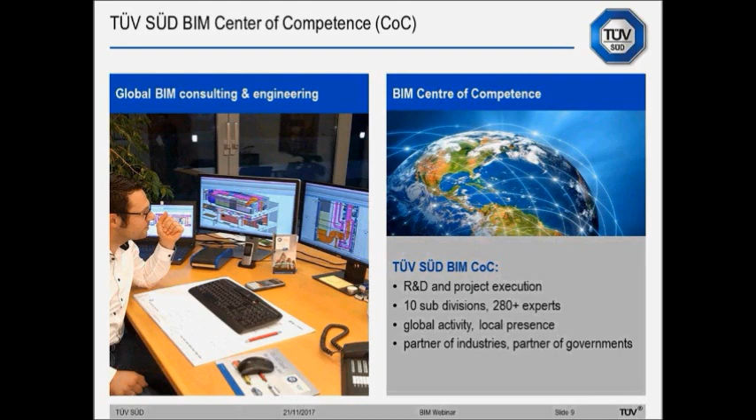When I say 'we', I mean the so-called BIM Center of Competence - our global organization that heads all TÜV SÜD BIM services, such as consulting and engineering. In our BIM COC, we join both R&D as well as project execution, mainly in areas such as industry and government. The BIM COC is the roof for a total of approximately 280 plus experts working in BIM. What I feel is really important to say is that our BIM topics are so diverse that intercultural, interdisciplinary work is absolutely essential to cope with the quality and performance of every BIM project. Since we have so many different roles in BIM projects - engineering, BIM implementation, safety simulations, energy and sustainability audits, BIM model, rail design - the global COC is really the roof for all these BIM topics we do in our daily business.

Building information modeling - you see I highlight the 'I' in BIM. So why did TÜV SÜD need to develop this new technology? I can tell you we're not digital maniacs getting paid to be super nerds. We came to BIM because our daily business was facing problems that we could not solve with classical technologies and methods from the past.

One issue I'd like to show you is sustainable environments. Here it's all about a lack of resources and energy that demands us to be much faster and cheaper in designing and auditing green concepts for single buildings, but also for whole cities. We faced the problem that simulations and energy concepts are too expensive and take too much time to program and develop. So we were seeking a much cheaper and faster way to help our clients build and operate more sustainable buildings and implement sustainability concepts much faster and cheaper.

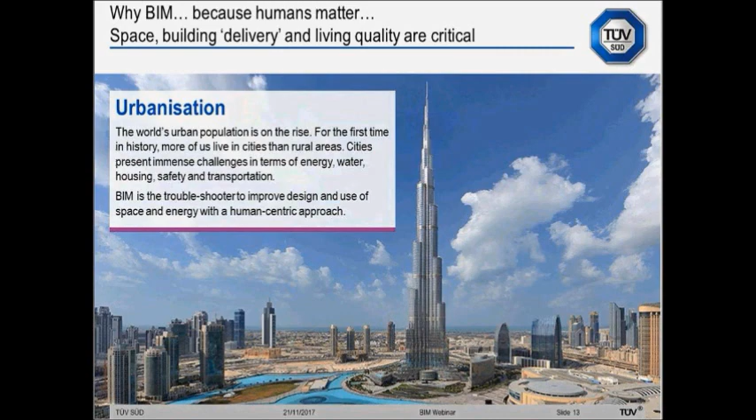The third pillar where we needed rapid change was transportation and logistics. Here we understood that urban transport projects are very cost intensive and long lasting, since underground or road extension projects require extensive pre-project analysis and huge data understanding to design fast, reliable and cheap public transport. So all these issues we faced as a consultant and engineering organization made us implement BIM, to turn the problems from the past into chances of the future.

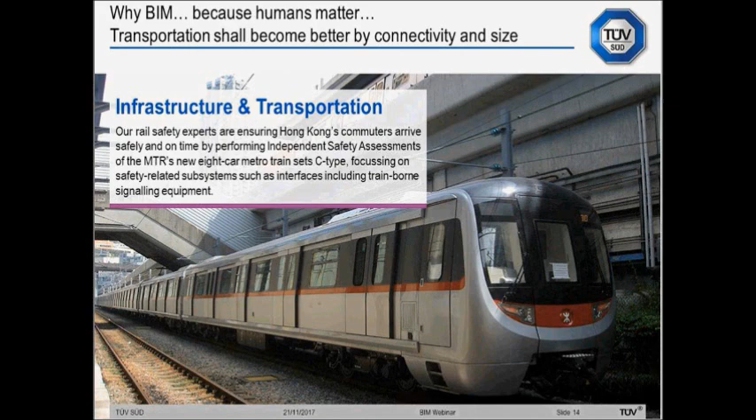Since our daily business really faces the life cycle of all assets, both in infrastructure and real estate, our BIM services are also 360-degree. Starting with BIM consulting, BIM strategy, followed by BIM implementation, BIM management, BIM engineering, BIM design, and BIM training. So we really have a lot of diverse BIM tasks in our daily business, which is why we rose up this 360 international team.

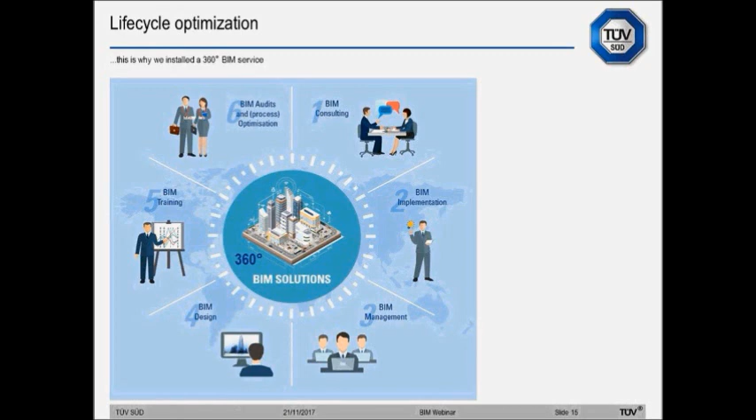About our definitions: I highlighted the I in BIM, but there's another interesting term we use, so-called digital prototyping for AEC, which means architecture, engineering, and construction. True BIM is really beyond 3D, meaning the so-called level of information plays a really important role.

Looking back and comparing technologies used in past years, BIM is a really dramatic change. In 2D, we created just schemes of an object, really abstract. In 3D, we created views of an object. With BIM, we create a fully functional prototype of the later asset. This means we have a virtual construction, and not only that, but added simulations and optimizations. This process of digital prototyping—virtual construction, simulation, optimization—is a very powerful improvement, especially for our building owners and investors.

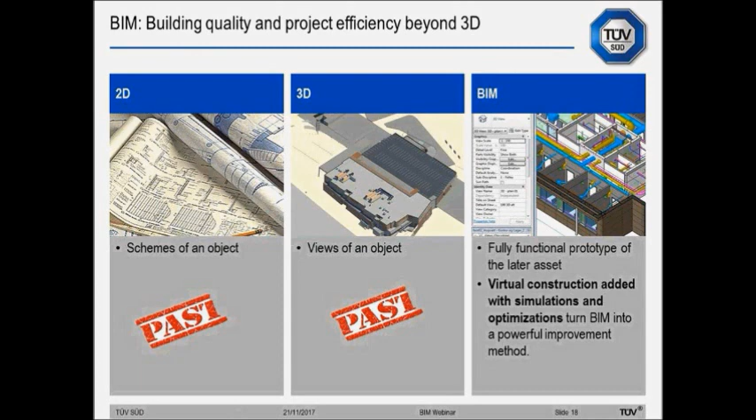Coming back to the point we highlighted earlier, the I in BIM: it's very important to say BIM is really beyond 3D, meaning the so-called level of information is very important. An empty BIM model does not bring you any benefits—this is only 3D by visibility. This is emphasized by the LOD, level of detail, which is all about how detailed you see the model. But the key is to bring real intelligence right into the building models, and this goes by the so-called LOI, level of information.

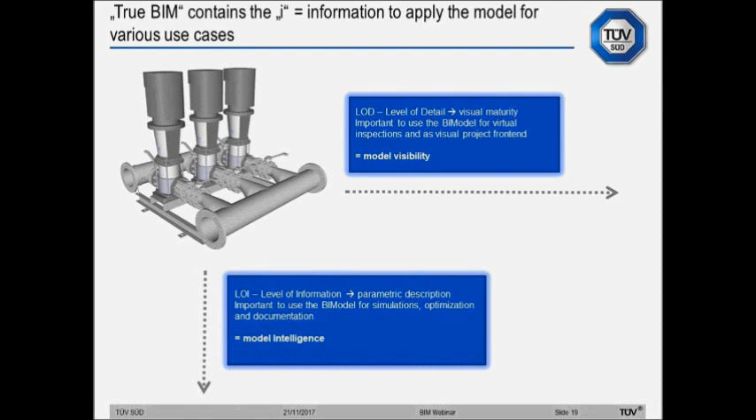Here it's all about the proper parametrics to run or execute the simulations, optimizations, and documentations. By adding information to the BIM model that you really use for this analysis and simulations, this is the real key. To give you a short overview of what the I in BIM—this parametric information—can be, here is a short overview.

Space optimizations, you already know, are about the 3D amount and spatial programs. In this area we also have clash detections, or what we call collision-free construction, which saves approximately 2% of the whole project budget. Also, we have maximum surface and spatial efficiency due to the fact that we can streamline and optimize spaces. Later, I will show you some project references.

4D and 5D is about the construction period—not about the building, but about the construction processes, where you can track time and budget in real time. So even if you make changes by yourself about the facade or about rooms, you can really understand the cost ratio of your changes, which empowers the design speed and the decision speed of the project.

6D is all about fast commissioning and digital working, as we call it, in the operational phase. This is about accurate project documentation without remapping or rearranging project data, and lifting it over to facility management.

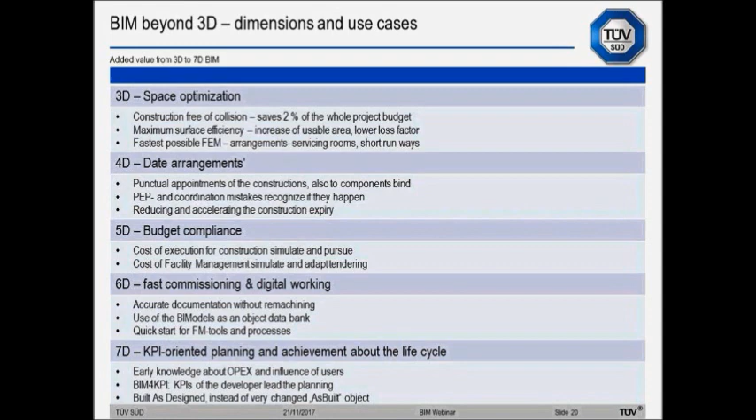So if you're using BIM as the owner or investor of a building, first you make your contractor really not see BIM as a kind of new method of documentation, but really also use and apply the BIM model as the real prototype of the later building, which means this can be the center for any simulations. This can be your project information model, for example, for creating very precise bill of quantities to prepare the construction period for time and cost monitoring and so on.

Also very important, looking to augmented and virtual reality, this is very interesting to use the BIM model as the visual model for developers and stakeholders, because imagine you can go into the building even in design stage, so much earlier than the real building is built in reality.

And last but not least, very interesting to use the BIM model as the building dashboard for financial due diligence and for technical due diligence, yes, and also for asset operation and real-time monitoring.

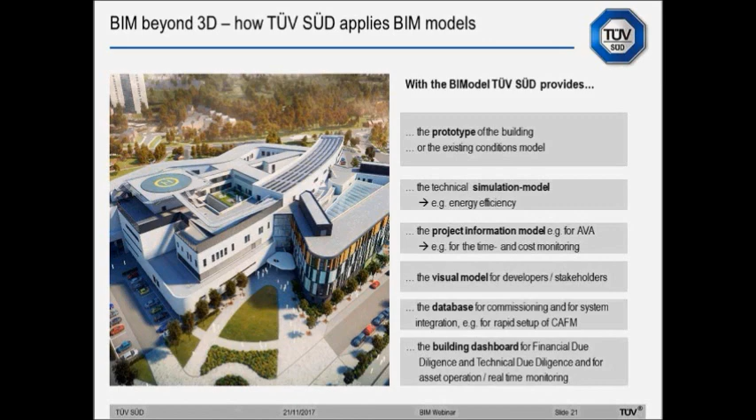So as a summary, I can say this is the effect that we get out of BIM if we apply it as the digital prototyping. This is faster design, much earlier simulations, cheaper optimizations, and for sure this leads to more sustainable operations. Remember, if we can add energy concepts here.

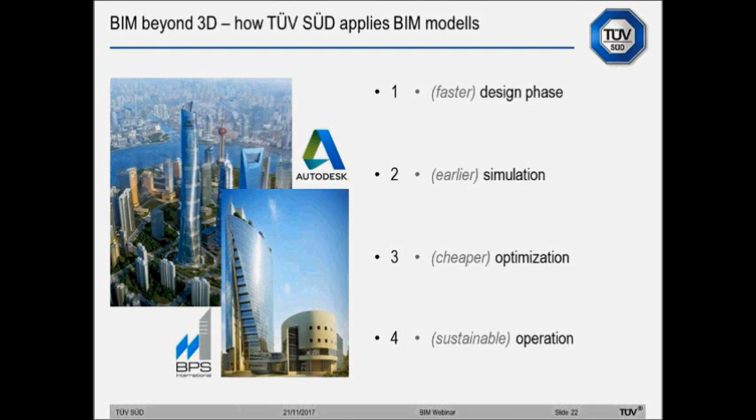When we meet owners, we're often asked, hey TÜV, give us a management summary on how to implement BIM properly. So this is what we have prepared for you today. I would like to give you a very short insight into proper BIM implementation. For us, this is about 3 steps.

And the first step, create use cases and optimize the ROI on BIM. So since BIM is a very big topic, I personally like the idea to create so-called use cases. That means to identify 3 to 5 current issues that cost you money or that reduce your profit or the building quality. We, for example, provide our clients with KPIs that we set up from other projects.

And with the so-called TÜV SÜD process matrix. So in my opinion, value-driven BIM means we find out current waste and cost processes, and then seek the best BIM method and BIM technology that can, so to say, heal your current issues.

Yes, we also benchmark, this is the next important issue, your contractor market, and create a BIM transformation roadmap that gives insight into which investment you need to make at which point of the project, and where and when is the ROI. So the first step is really about creating a BIM strategy, about use cases, about the proper BIM technology, and so on.

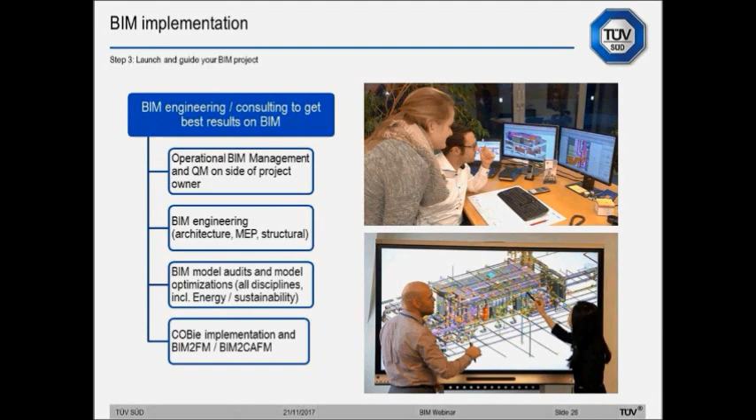To make it more interesting, I'd like to show you two BIM implementation projects of TÜV Süd. One is for what we call public BIM in Germany, for a municipality located in the Main-Taunus region.

For this German municipality, we ran a digital transformation project for school projects. Their major problem was time loss, so their demand was to accelerate project planning and improve sustainability. We digitalized the planning process so draft models were created and used even in phase 0, which we use for lifecycle analytics and sustainability checks. The BIM result is very interesting: while project planning lasted 11 months before our audit, BIM enabled us to start BIM design within 14 weeks.

Due to lifecycle analytics, for example for facades or floors using the Autodesk Tally program, it's expected to save between 10 to 20% of construction costs. Interestingly, similar school projects in the UK government show BIM cost savings of nearly 40%. We expected in this Main-Taunus region school project that BIM could save, due to lifecycle analytics, between 10 and 20% of costs.

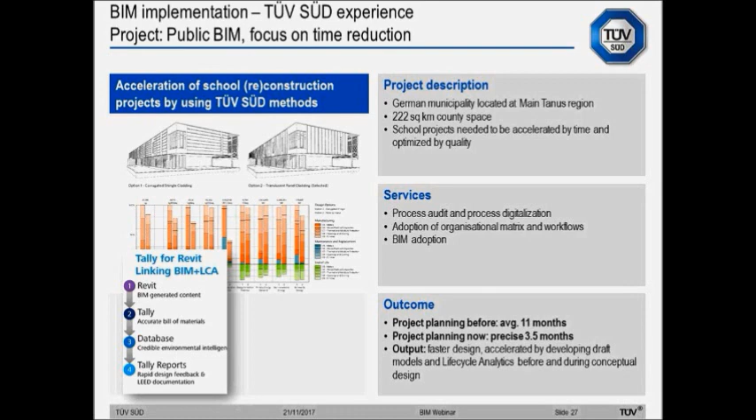Another interesting implementation project was for industry, not the public sector. This is a global manufacturer of laser and industry production solutions, located in Stuttgart. This organization planned 5 new buildings with a total construction volume of approximately 92.5 million euros.

We made a BIM ROI analysis because this company wasn't sure if they really wanted to invest in BIM, since they first saw BIM as a true cost factor. So we ran BIM ROI analytics and BIM feasibility studies. We implemented CAFM before we implemented BIM, because this is a so-called self-operator, and they wanted to use the BIM models also for operation.

What's interesting in this project is that we benchmarked OpenBIM, meaning IFC, against native Revit, and came to the point that native Revit brings the highest profit. In this construction volume of approximately 93 million euros, we saw potential cost savings of 10.2 million euro with the Revit model, while we found that IFC anyhow brings 1.6 million in benefits.

The highest cost savings we found were in space optimization—less construction costs—and also in energy optimization, which we found can save 6% energy compared to existing buildings. Also, the data handling for as-built documentation and error-free design led to these very huge cost savings with BIM.

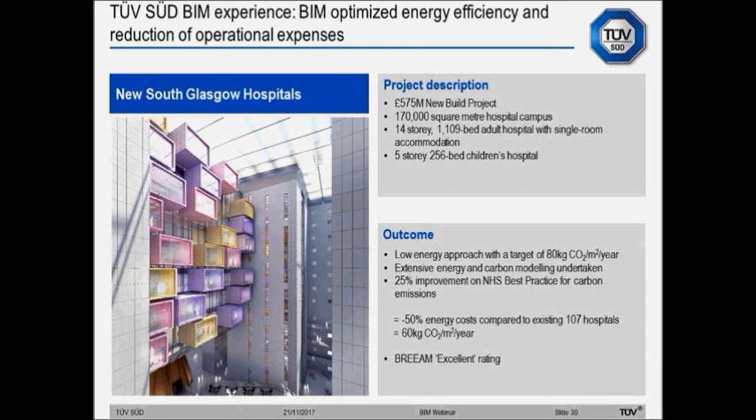Here's our schematic approach: first, we use simple conceptual models to streamline spaces. Later, we use room models to rearrange room layouts. Then we use the MEP models to optimize HVAC system layout. And then we use the construction model to optimize materials. With this 4-step analysis, we really reached the point where we could save 50% of the energy costs.

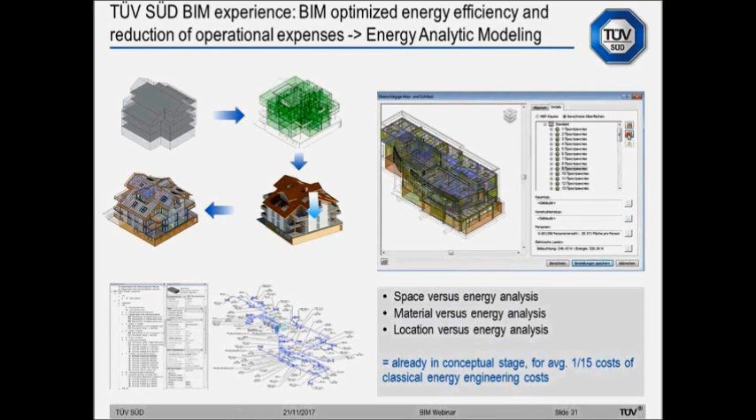Space efficiency. This is what we also showed you before. So how we do it here - this is the so-called St. James Center, a multifunctional complex located in Edinburgh, UK.

It's really interesting that here we collaborated with our facility management experts who advised the engineering on facility management processes and FM layout of the MEP systems. Due to these spatial optimizations of service alleys, we came to more compact space alleys, but at the same time we cared for a better operability HVAC layout.

We could save a total of 8,500 cubic meters of space volume, which saved approximately 9 million in construction costs, and also downsized the energy by nearly 25% due to use of spaces. It's important to understand that these space optimizations really cut down both the loss factor and construction costs, but also help increase the energy level and get a higher energy certificate.

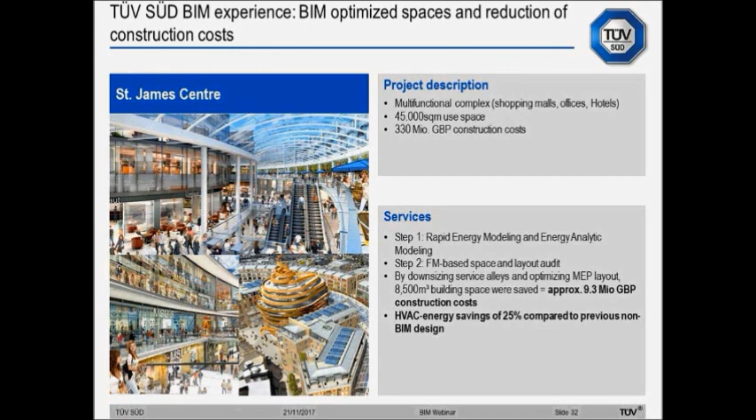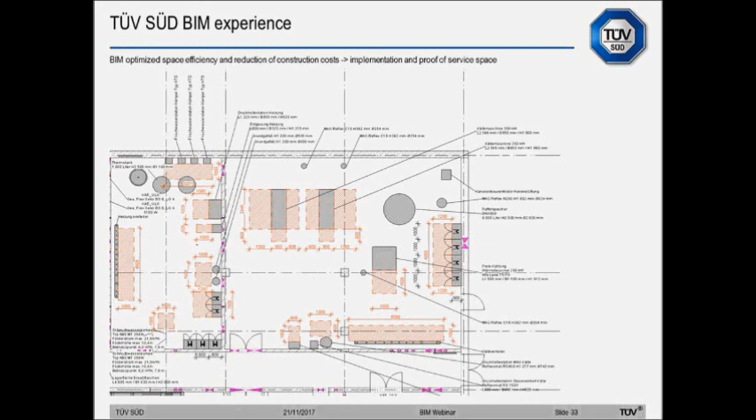This is a screenshot I did for you from this spatial audit. You can see that we implemented the systems in gray, and also the space needed for maintenance and repair. This really allows us to streamline the whole service area and building area, leading to a high saving of space and, due to this, construction costs.

This is a very interesting project from our partner, so-called BPS International. They were asked to carry out the BIM project of Park Huamin, a Chinese investment project located in Moscow - a huge building, approximately 100,000 square meters of use space.

Here they also played with the basis of the HVAC system, and by not downsizing but creating this two-story layout of the central HVAC unit, they transformed 1,000 square meters that was used for this central HVAC unit into a use space. The investor was very happy to transform this freed-up technical space into 4 apartments, and he sold it for $4 million.

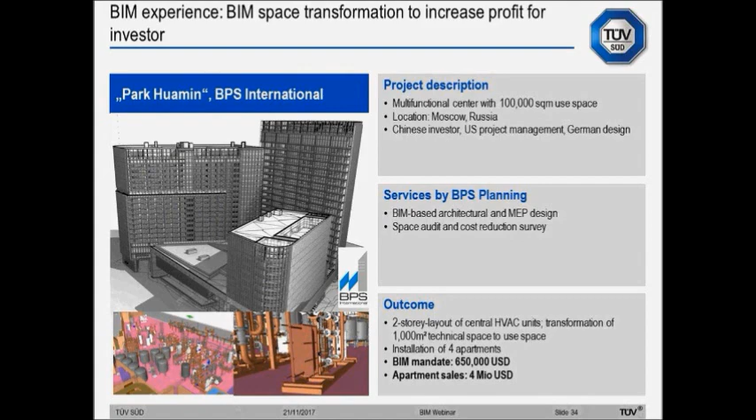This is really interesting because the BIM mandate and all just cost only $650,000 - so this is really nice profit. You really understand that spatial optimizations play a major role in this BIM execution.

Battersea Power Station - I think this is a project that some of you might really know. This is a very famous project located in London, and this was the old - I think even the largest power station in the UK from the early 1920s, 1950s - now transformed to a living quarter.

Phase 1 includes 2 apartment blocks with 750 and 100 units. Our task was to care for the MEP design and also for the spatial optimization.

Since the investor wanted to really speed up the sales process, we were asked to speed up the construction process. We found that if we use the so-called prefabrication function of BIM, we could save an average of 10% of construction time for the investor.

Here is a list of prefabrication use cases that we use for these projects. We could really upgrade the construction quality, which is really relevant, because if you only start constructing or assembling all these parts at the construction site, this can lead to component loss, component quality lags, and so on. This prefabrication really brings both benefits for construction quality and, as we saw, also 10% saving in construction time.

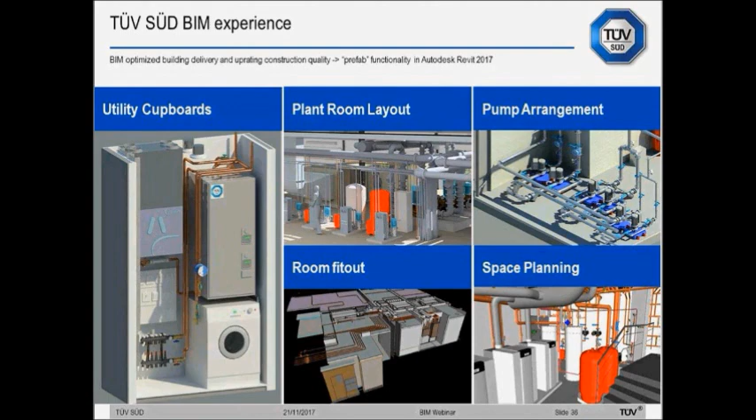Here is the next interesting point if we talk about speed - design acceleration. This is again a project of our partner BPS International. They were asked to care for the architecture of South Russia's largest airport, located in Rostov.

This project was planned for 4 months to develop the conceptual design to construction design. The contractor appointed 4 months for this task, and ordered 8 architects. What's interesting, due to the parametric approach that automates this daily process on the side of the architect and engineering company, it's really impressive that BPS needed only 2 months - half the time - to develop this sophisticated architecture from conceptual to construction design, and with only 2 architects, not 8.

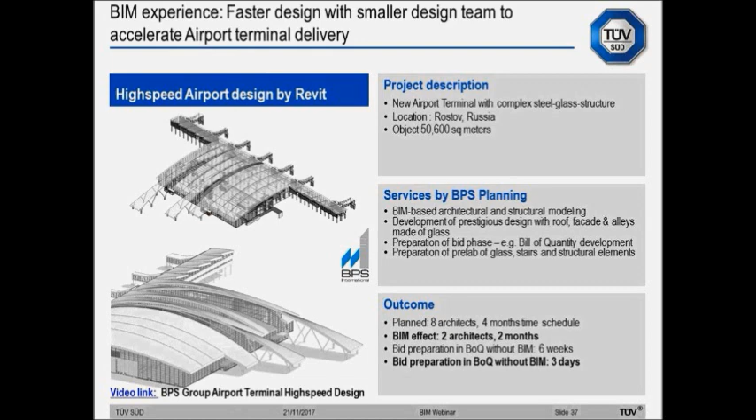This is also our expertise when we do MEP design - BIM, due to this parametric approach, really fully automates, for example, replacement of components, creation of bill of quantities, and so on. This is really impressive, and by these two projects you see that both construction can be accelerated, but also, as you see in this airport, the design phase.

And since we have a little bit of time, I'd like to give you an outlook to what will be developed in BIM in the nearest future.

So today we talk about the BIM model, and the model itself always indicates a kind of rigid, static thing. But interestingly, we're transforming the digital prototype into connected BIM. We have partners - BPS International is one of our engineering developers.

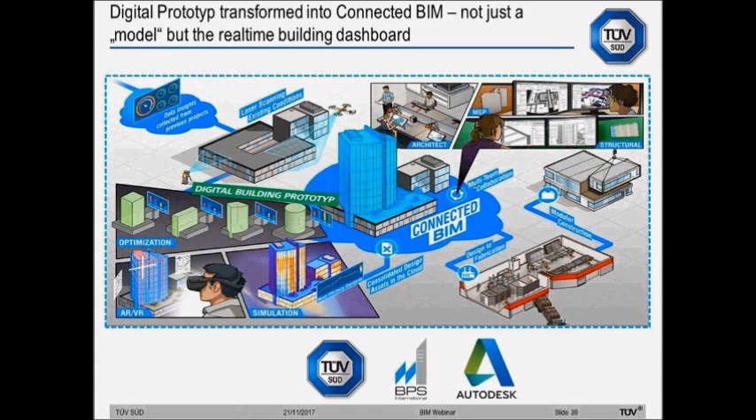And we're using Autodesk technologies to build this solution. So connected BIM really means we take this digital building prototype and lift it over to the building dashboard in facility management - for multi-team collaboration, AR, VR, simulations, operational facility management, and so on. And connected BIM, because we're adding sensors to the model.

The test lab for this is the Country Park 3. This is the building of BPS International. And the small image you see here is the facility management office where the Revit model runs as a live model for collaboration of the facility management. It's very easy to plug sensors into the BIM model to carry out so-called predictive service.

So no longer preventive service, which is approximately 7 to 10% of the OPEX, but we really think to use the BIM model for operational facility management to analyze systems in real time - not to send mechanics there every day for a short-term eye-to-eye check of an existing pump or conveyor, but really to use sensors for real-time monitoring of devices every time, 24 hours a day.

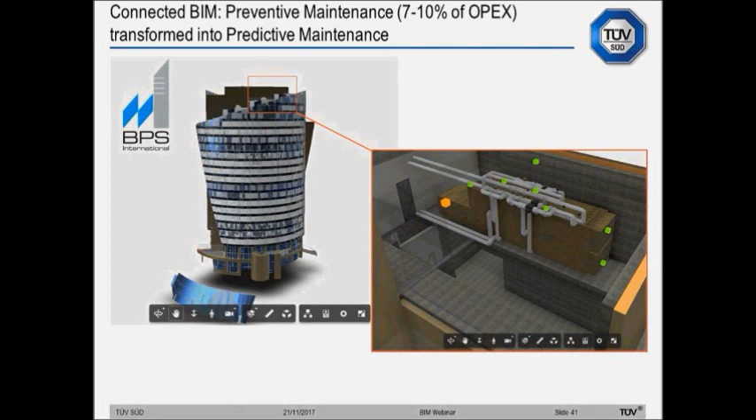And by this big data we really gain a better understanding of how we can save energy in the building, and how we can save cost for facility management in the building.

We're using so-called sensors and a cloud connector. Here is a short overview of use cases we can track or evaluate with the sensors - this is all about atmospheric conditions like temperature, carbon dioxide, humidity, pressure, vibrations. Vibrations are very interesting to care for in facility management, intensive pumps, noise also, light, positioning, and also orientation.

And what we found out is that as soon as we talk about BIM models that really have full building knowledge - the full building inside - and if we're now on top talking about operational data, we found out that it's really, really crucial to have very safe data storage.

TÜV SÜD acquired a company called Uniscon that provides what we call secure data platforms, and we're using this secure data platform to operate or install our BIM services there. That means at TÜV SÜD, on these Uniscon servers, our BIM models are running, and not only our BIM models, but also the operational data we evaluate with a BIM-to-sensor strategy. It's all about tracking the performance and reliability of building systems and so on.

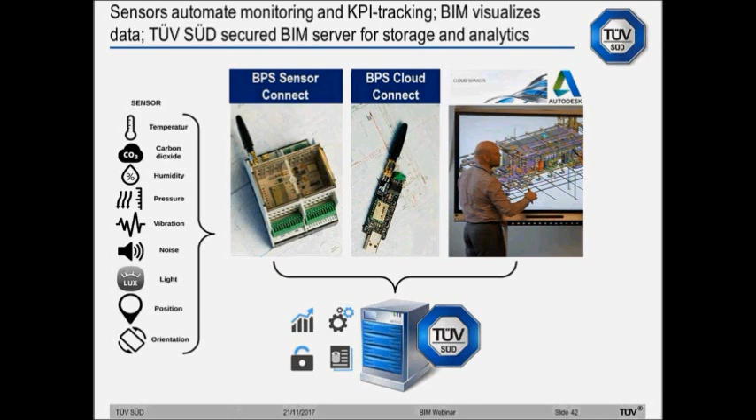So connected BIM also helps for commissioning. Here we made a short example from commissioning of a laboratory - maybe you can see it in this model. This is during the soft launch of this laboratory, and here's the central technical unit that we lifted to the roof of the building.

And all these small yellow warning marks that you see on the screenshot indicate that the system still has a problem. This digital commissioning that we carry out with BIM and sensors helps to shorten the soft launch time. In this laboratory, it was planned for 24 months, and we cut it down to 6 weeks, because imagine if you have sensors that measure every second the performance and criteria of the systems. It's possible for technicians to very, very fast understand where to adjust components, how to set them up, and so on.

So, as I said, this connected BIM is not only a tool for facility management to reduce facility management costs, but this is also very, very interesting to use as what we call digital commissioning.